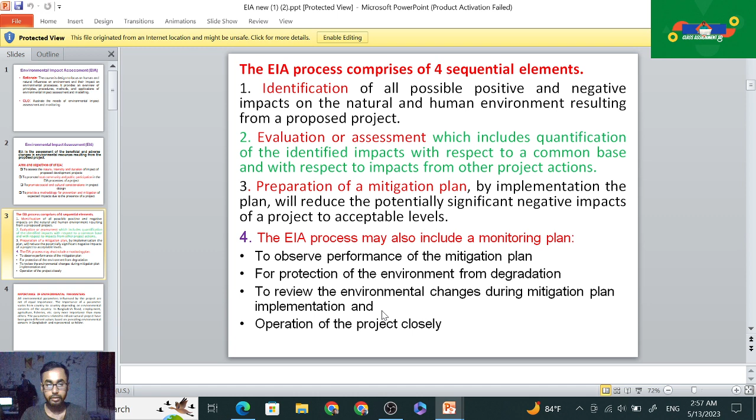Number four, the EIA process may also include a monitoring plan to observe the performance of the mitigation plan for protection of the environment from degradation, and to review the environmental changes during mitigation plan implementation and operation of the project closely. Then, importance of the environmental parameters.

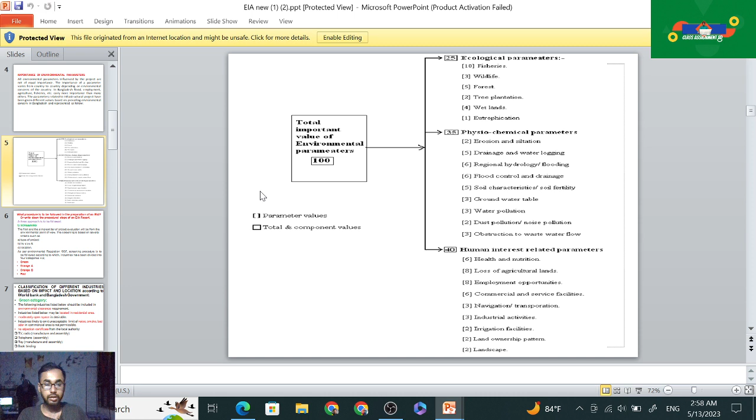The parameters related to the infrastructure project have been given different values based on prioritizing environmental concerns in Bangladesh, and represented as this. This is the total important value of the environmental parameters. If we denote it with 100, then the third bracket is the parameter value, and the total of the component value.

If we zoom in, first of all, the ecological parameters: fisheries is 10, wildlife 3, forest 5, tree plantation 2, wetlands 4, eutrophication 1. 25 is the parameter value of the ecological parameters, and the physicochemical parameters is 35.

2 is erosion and siltation, 5 is drainage and water logging, 6 is regional hydrology and flooding, 6 is flood control and drainage, 5 is soil characteristics and soil fertility, 3 is the groundwater table, 3 is water pollution, then dust pollution and noise pollution. 3 is obstructions to the wastewater flow.

40 is the human interest related parameters: health and nutrition 6, loss of agricultural land, employment opportunities 8, commercial and

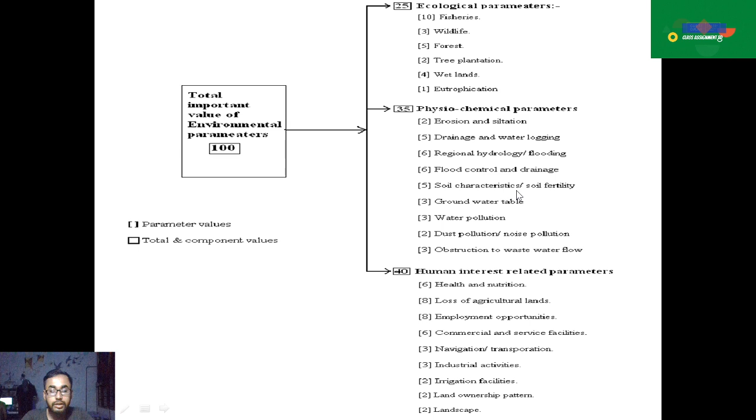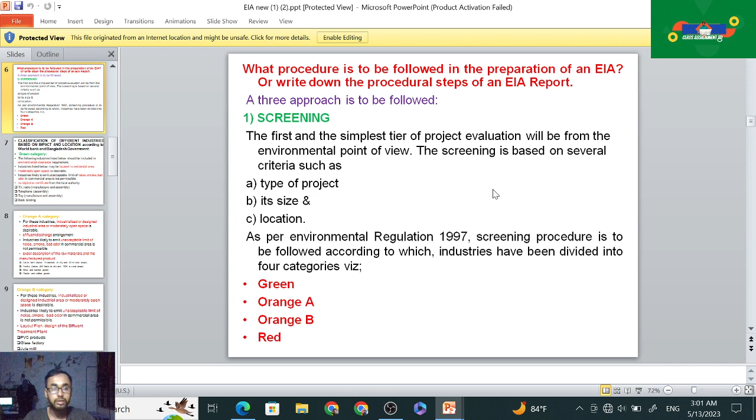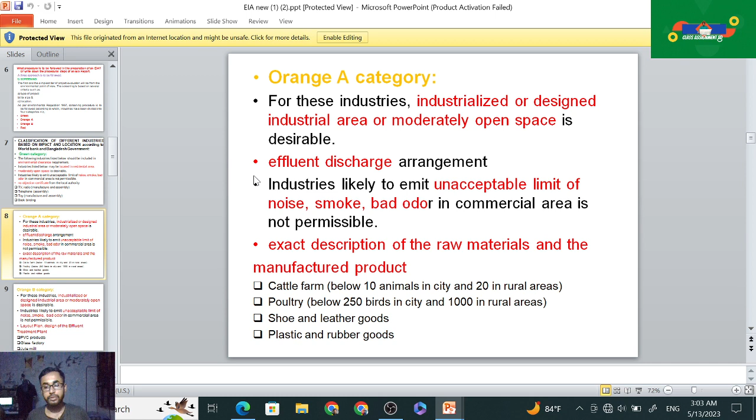Exact descriptions of the raw materials and the manufactured product will be under this orange category. Then cattle farms below 10 animals in the city and 20 in rural areas, poultry below 250 birds in the city and 1000 in rural areas, shoe and leather goods, then plastic and rubber goods.

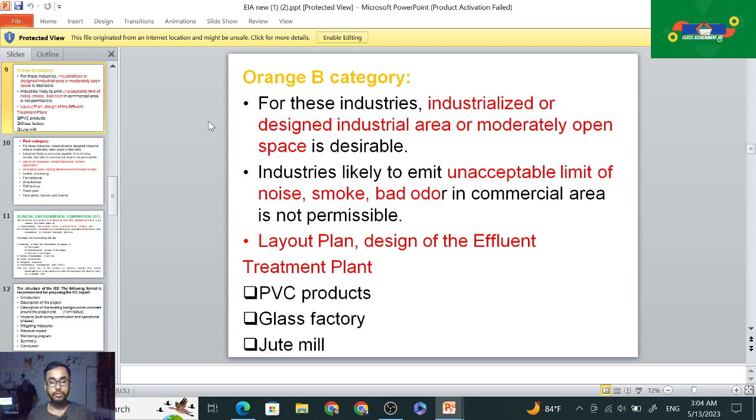Layout plan design of the effluent treatment plant. PVC products, glass factory, jute mill will be under the orange B category. So in orange B category, an industrialized or designed industrial area or moderately open space is desirable, and industries likely to emit unacceptable limits of noise, smoke, or bad odor in the commercial area are not permissible. The layout plan design of the effluent treatment plant is also under orange B, and PVC products, glass factory, jute mill are in this category.

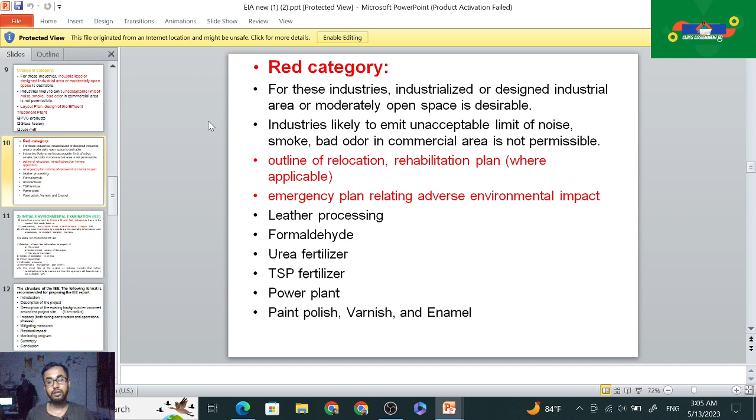Next is leather processing, formaldehyde, urea fertilizer, TSP fertilizer, power plant, then paint, polish, varnish, and enamel. These are also under the red category.

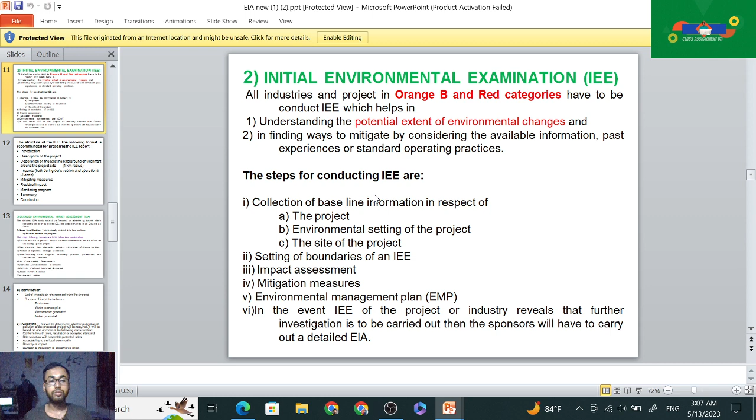And in the event the IEE of the project or the industry reveals that further investigation is to be carried out, then the sponsor will have to carry out a detailed EIA. Then the structure of the IEE: the following format is recommended for preparing the IEE report. First of all is the introduction. Number two is the description of the project, description of the existing background environment around the project site, 1 kilometer radius, impacts in both construction and operation phases, mitigating measures, then also residual impact, monitoring program, summary and conclusion.

Structure of the IEE: the following format is recommended for preparing the IEE report. Introduction, then description of the project, then description of the existing background environment around the project site, impacts in both construction and operational phases, mitigation measures, residual impact, monitoring program, summary and conclusion.

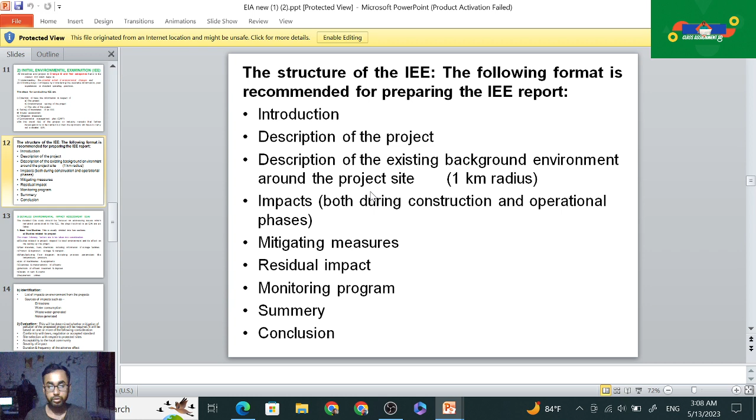Then detailed environmental impact assessment, EIA. The detailed EIA study should be focused on addressing the issues which remain unresolved in IEE. The steps involved in EIA are as follows. Number one is the baseline studies. This is usually divided into two sections. Studies related to the project: the major factors taken into consideration. A is the studies related to the project with respect to the local environment and its effect on setting up the project.

Then B is the raw materials, fuel, chemicals, including information on the storage facilities. C is the product and byproduct, storage and transport. D is the manufacturing flow diagram, including process parameters like temperature, pressure, list of machinery and equipment, then quantities and characteristics of effluents, methods of treatment and disposal, then details of vents and stacks, and requirement of utilities.

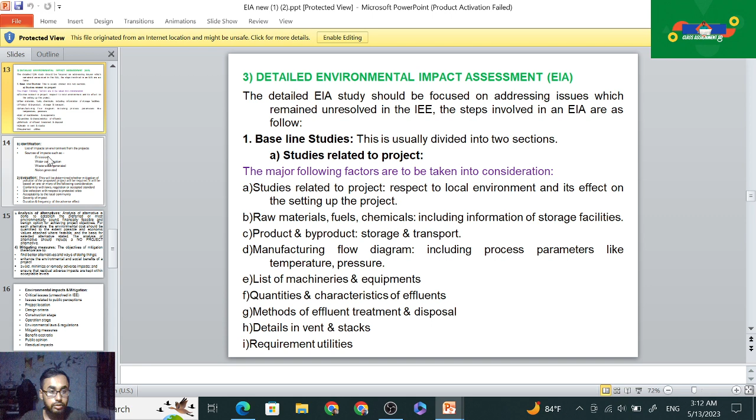Then identification: list of impacts on the environment from the project and sources of emission, water consumption, wastewater generated, noise generated. Then evaluation: this will determine whether the mitigation of the pollution of the proposed project will be required.

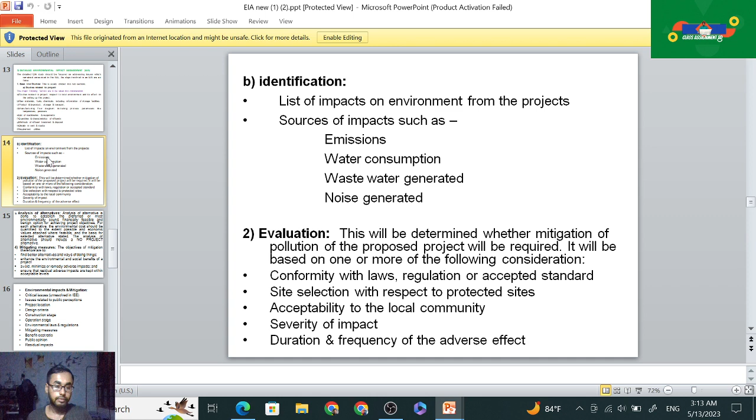It will be based on one or more of the following considerations: conformity with laws, regulations, and accepted standards; site selection with respect to protected sites; acceptability to the local community; severity of the impact; duration and frequency of the adverse effect.

Then analysis of the alternatives. Analysis of the alternatives is done to establish the preferred or most environmentally sound, financially feasible, and benign option for achieving the project objectives. For each alternative, the environmental cost should be quantified to the extent possible, and economic values attached where feasible, and the basis for the selected alternative stated. The analysis of the alternatives should include a no project alternative.

What is the mitigation measure? The objectives of the mitigation therefore are to find better alternatives and ways of doing this, enhance the environmental and social benefits of a project, avoid, minimize, or remedy the adverse impacts, and ensure that residual adverse impacts are kept within the acceptable levels.

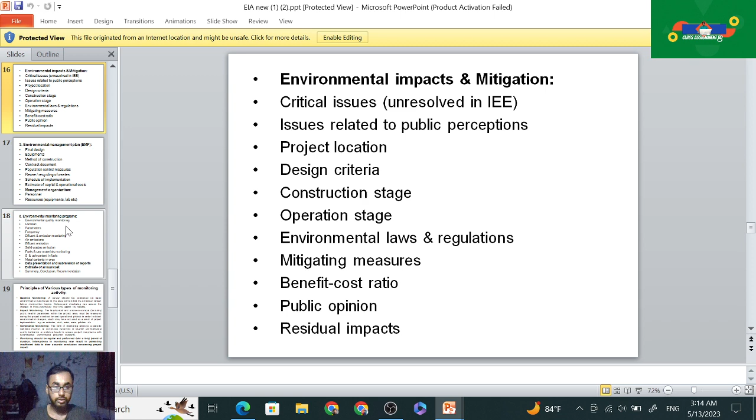Then environmental impacts and mitigation. The critical issues unresolved in IEE. Then issues related to public perception, project location, design criteria, construction stage, operational stage, environmental laws and regulations, mitigation measures, benefit cost ratio, public opinion, residual impacts, and then environmental management plan, EMP: final design, equipment, method of construction, contract documents, pollution control measures, reuse and recycling of the waste, schedule of the implementation, estimate of capital and operational cost, then management organization, personnel and resources, equipment, lab, etc.

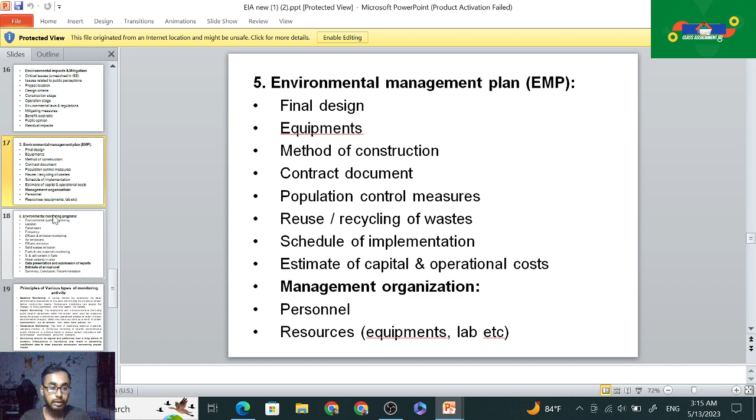Then environmental monitoring programs: environmental quality monitoring, location, parameters, frequency; effluent and emission monitoring, air emissions, effluent emissions, solid waste emissions; fuels and raw material monitoring, sulfur and ash contents in the fuels, metal contents in the ores; data presentation and the submission of the reports, estimate of the annual cost, then summary, conclusion and recommendations.

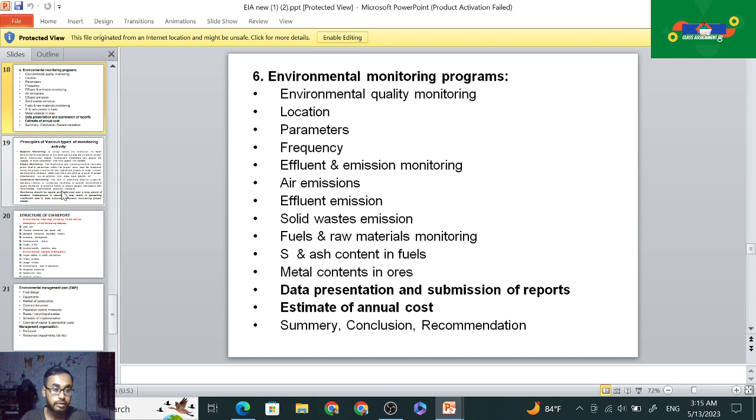Then the principles of different types of monitoring activity. First of all, the baseline monitoring. A survey should be conducted on the basic environmental parameters in the area surrounding the proposed area before the construction begins, and subsequent monitoring can assess the changes in these parameters over time against the baseline.

Impact monitoring: the biophysical and the socio-economic, including the public health parameters within the project area, should be measured during the project construction and operational phases in order to detect the environmental changes which may have occurred as a result of the project implementation: air emission, dust, noise, water pollution, etc.

Compliance monitoring. This form of monitoring employs a periodic sampling method or continuous reading of a specific environmental quality indicator or pollution levels to ensure the project complies with the recommended environmental protection standard. Monitoring should be regular and performed over a long period of duration, and interruptions in the monitoring may result in generating insufficient data to draw an accurate conclusion concerning project impact.

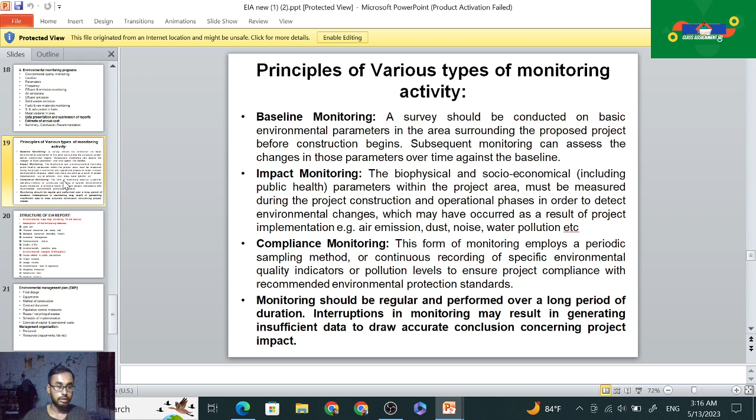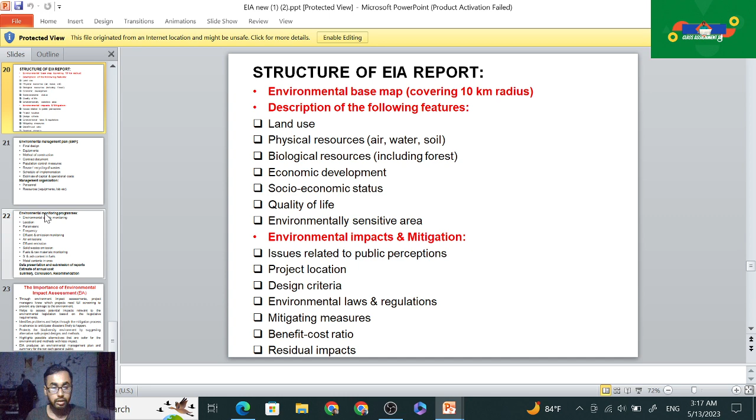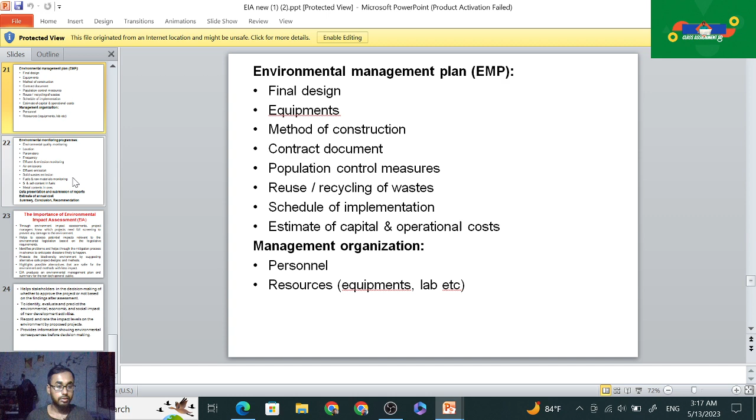Then environmental impacts and mitigation: issues related to public perceptions, project location, design criteria, environmental laws and regulations, mitigating measures, benefit cost ratio, and the residual impacts. Then environmental management plan, or EMP: final design, equipment, method of construction, contract documents, pollution control measures, reuse and recycling of the waste, schedule of the implementation, and estimation of the capital and the operational cost, management organization, personnel, resources, equipment, lab, etc.

Then environmental monitoring programs: environmental quality monitoring, location, parameter, frequency; effluent and emission monitoring, air emissions, effluent emissions, solid waste emissions; fuels and raw material monitoring, sulfur and ash content in the fuels, metal content in the ores. Data presentation and the submission of the reports, estimation of the annual cost, summary, conclusion and recommendation.

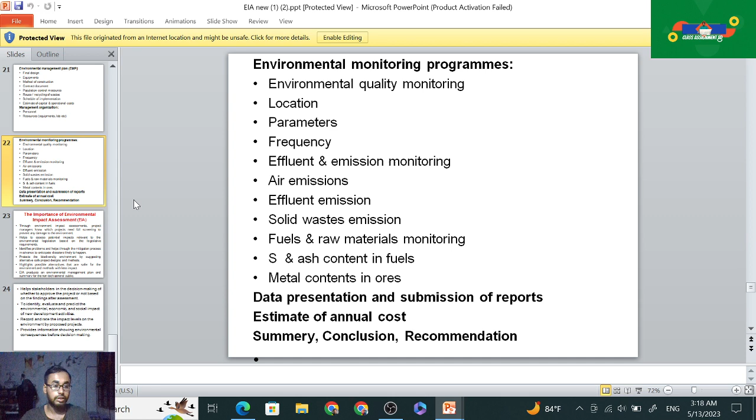And the importance of the environmental impact assessment, EIA. Through environmental impact assessment, project managers know which projects need full screening to prevent any damage to the environment. It helps to assess the potential impact relevant to the environmental legislation based on the legislative requirements, identifies the problems and helps through the mitigation process in advance to anticipate the disasters likely to happen, protects the biodiversity and environment by suggesting alternative safe project designs and methods, and highlights the possible alternatives that are safer for the environment, and methods with less impact.

EIA produces an environmental management plan and summary for the non-technical general public. Then it helps stakeholders in the decision making of whether to approve the project or not based on the findings after the assessment. To identify, evaluate and predict the environmental, economic and social impact of new development activities, record and rate the impact levels on the environment by the proposed project, and provide information showing the environmental consequences before decision making.